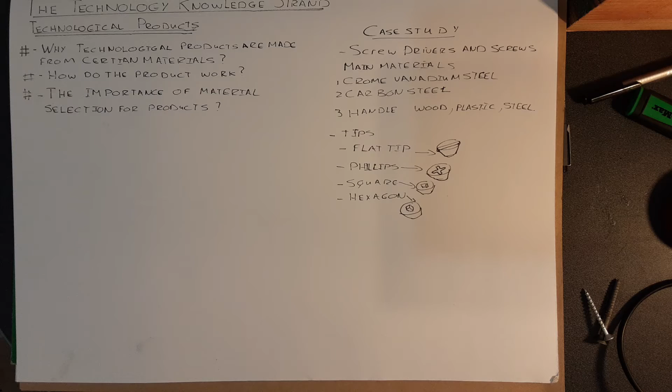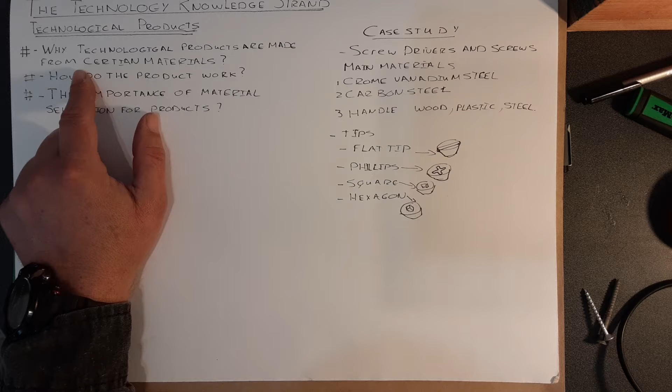In this video, we're going to talk about the technology knowledge strand, and our heading on this one is technological products. So the questions that you have to ask yourself whenever you look at technological products is why technological products are made from certain materials, how does the product work, and the importance of material selection for the products.

So today our case study will be on screws and screwdrivers. What I'm going to do first is talk about just two screwdrivers that I looked at for this study. So we can see different materials already being used here.

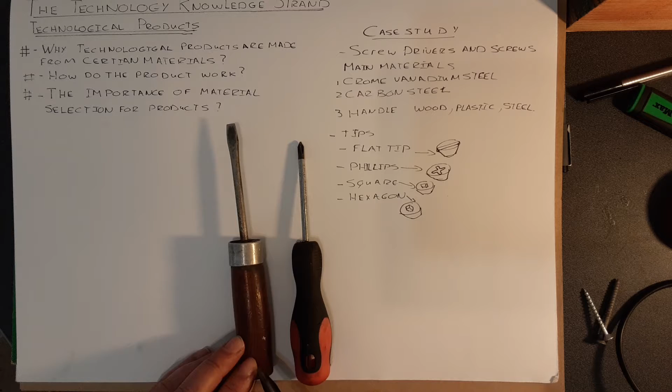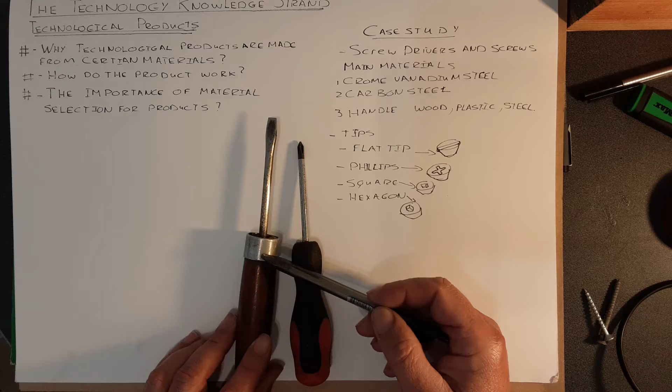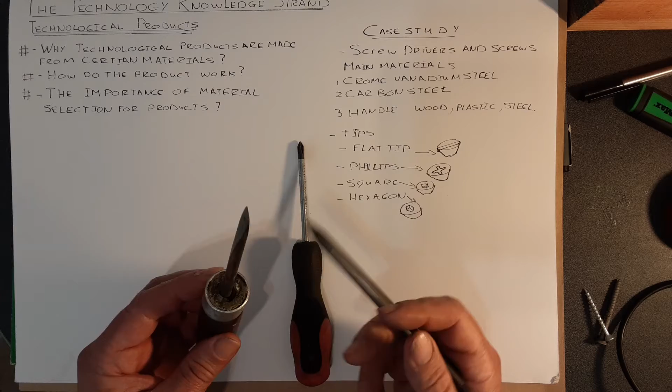So let's look at the materials here. This one, we can see it's probably carbon steel, the front bit, because it gets quite corroded. Then there's a bit of aluminium here to support the part into the wooden handle. Mainly these wooden handles were rosewood because it's quite a strong wood, and actually it looks quite good. So the aluminium ring there is just to keep this bit from splitting when this is forced into the handle bit.

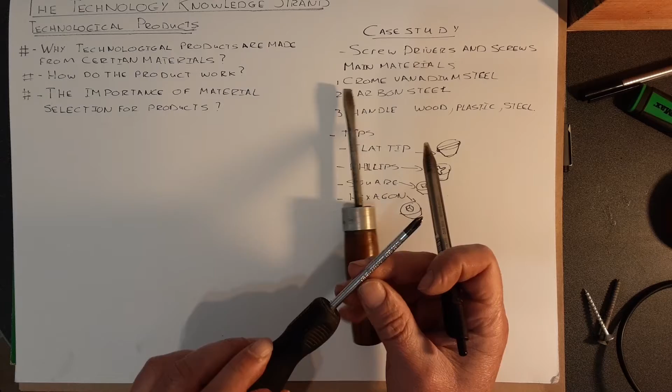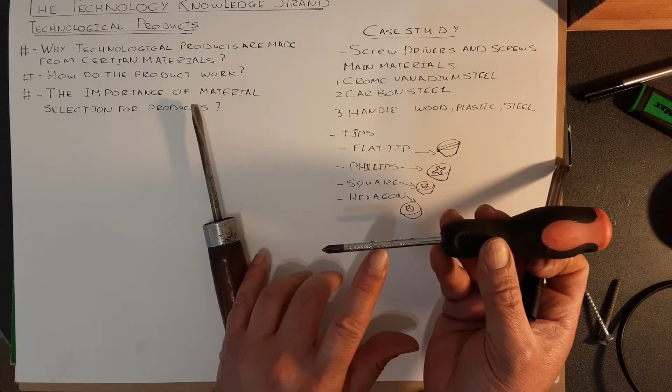So like I say, this is a pre-1950 model, and it still works pretty good. Then the newer ones, you can see as well, the material will be written on here: chrome vanadium steel. This one was the carbon steel and a wooden handle. So chrome vanadium steel, and then the tip will be hardened to keep it stronger.

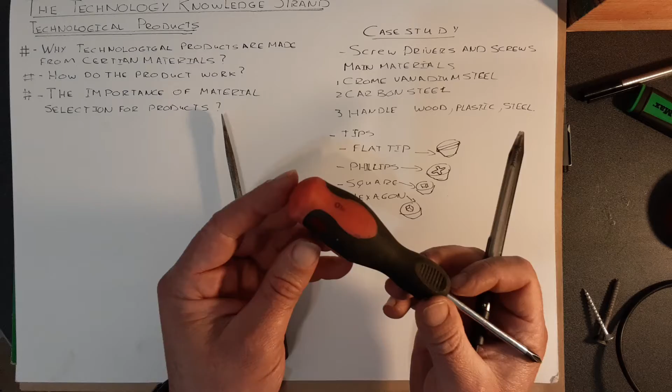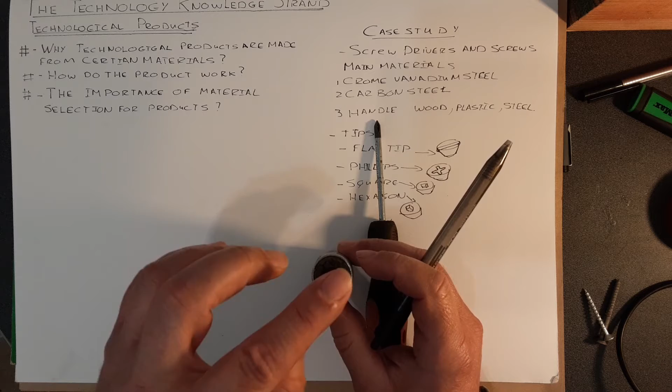Oh, I forgot to mention that this is a flat screwdriver and this is a Phillips head, and we'll go a little bit into that in a little while with the screws. This handle is made out of a rubber and plastic compound, which is cast around this end. The tip will be forced into the screw, into the wooden end.

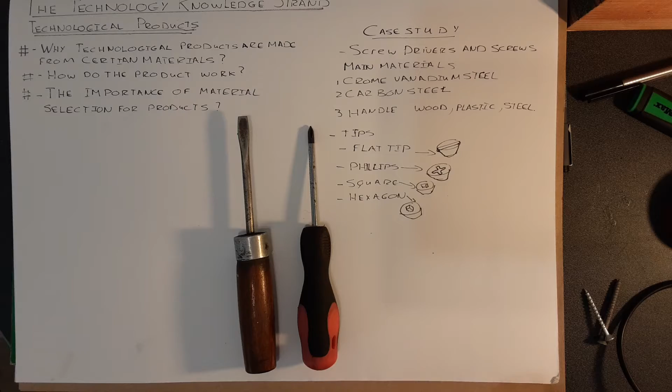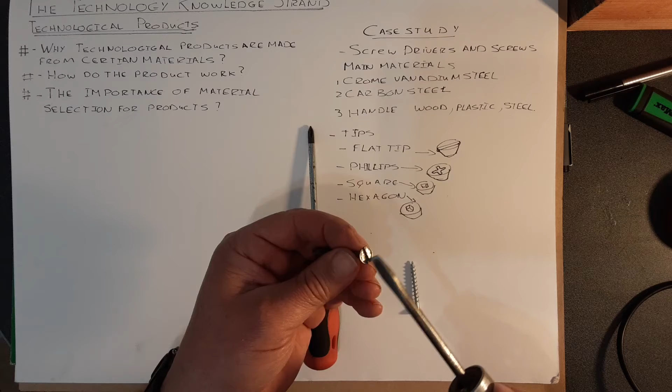So these two are among the commonly used screwdrivers until square heads arrived. This is a flathead screw. The screwdriver fits in there and you can turn it into something. This works really good if something's painted because it will be easy to get the paint out of this part, and then you can still tighten this in.

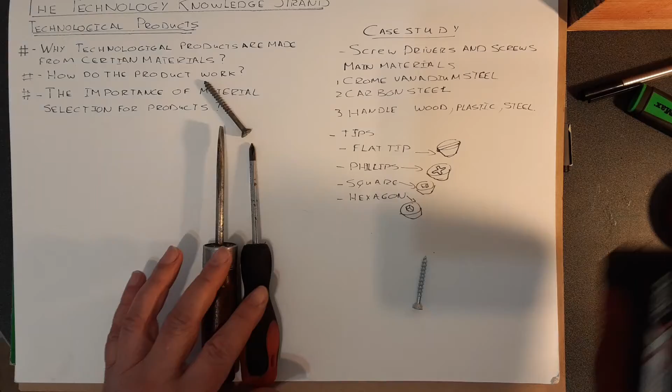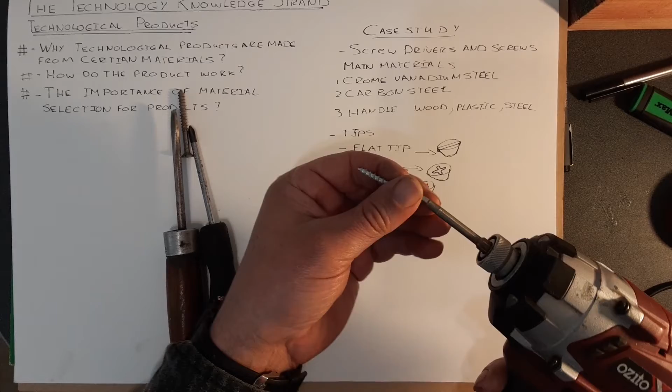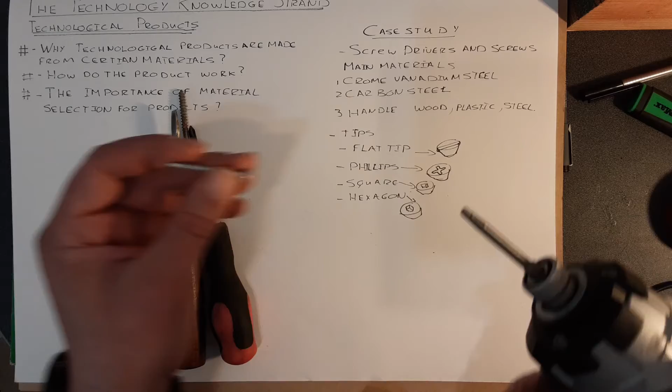Now this is also an evolution of the screwdrivers, so handheld screwdrivers, and this is the impact driver, so you don't have to hand turn stuff anymore. You can just press the button and that turns the screw into something. You can undo it by just changing this around.

So if you look at kind of this little progression on screwdrivers, handheld, and then it came over to machine, and the first ones were with mains power, but the batteries, like you guys know, have improved so much so that this can work really good with a battery powered device. So if there weren't people asking questions, or if there was no evolution of technological products, we would still be using this one, turning screws in by hand.

But stuff has moved up, so flathead, Phillips, and then the squared ones. You get flatheads with the modern handle as well, so the flathead is still around. Phillips is just named after a guy, his surname was Phillips, that patented the first Phillips head screwdriver. And then the newest ones today on the market, it's more or less the same as the square head, but it's just a hexagonal head. So you've got a hexagon on the top, and that gives you more areas, or more parts, for the screwdriver tip to grip onto.

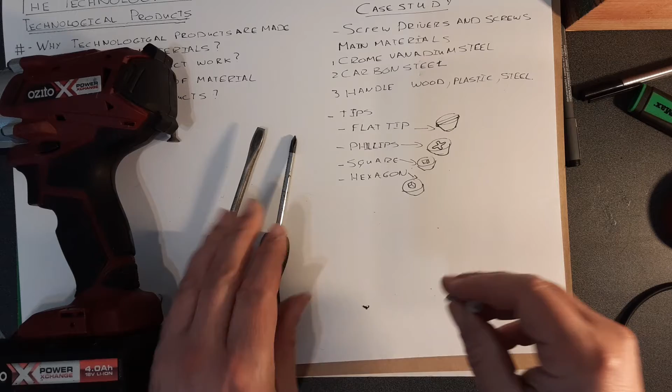Now, looking at all this, let's recap everything quickly. So technological products, what are made from certain materials, how do the product work, and the importance of the material selection for the product.

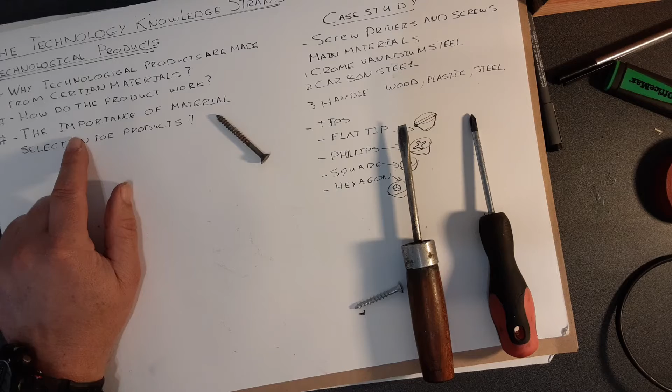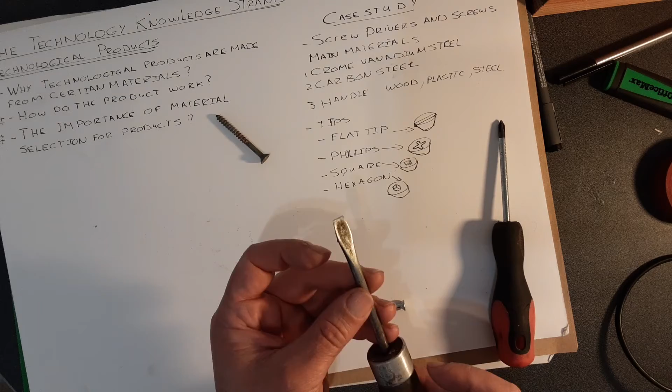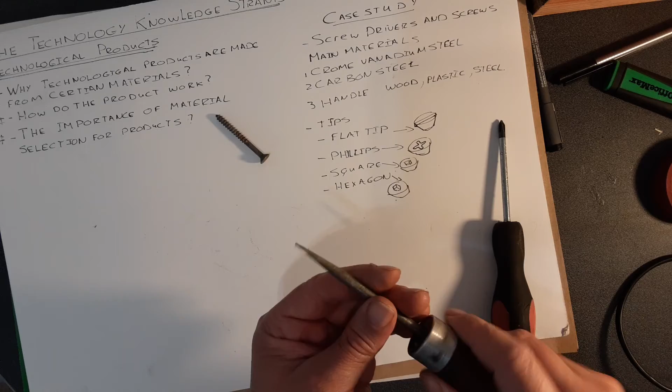So if you made this part out of wood, it will probably won't work that good, that's why it needs to be steel. It needs to be important, the material that you used it from. And then the handle as well, it needs to work. If this falls, if it was a brittle material, it will just break. And the comfort of using it, this one's actually much more ergonomically friendly.

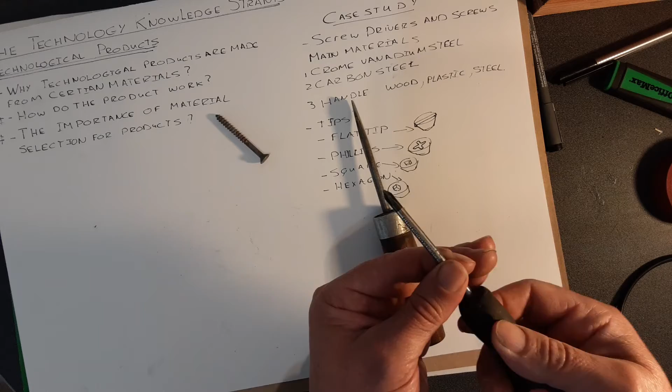With plastics we were able to cast stuff in different ways, so you can use this quite neat. So it's got a quite good grip in your hand.

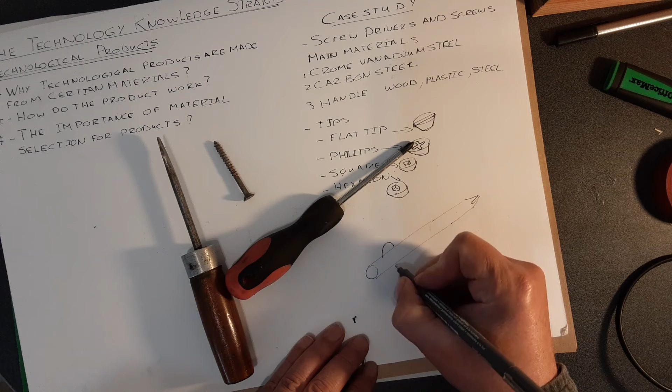Another thing that I just want to talk about is when they cast this screwdriver, the back of the chrome vanadium steel part of it, if you look at it like this, so there's my tip of the screwdriver. The back, somewhere in the back, will be two bits that's just flattened with a punch or a press, and those two bits get cast in here, and that keeps it from being pulled out of here. So it's just two little flat wings that's been pressed into the steel while this is manufactured.

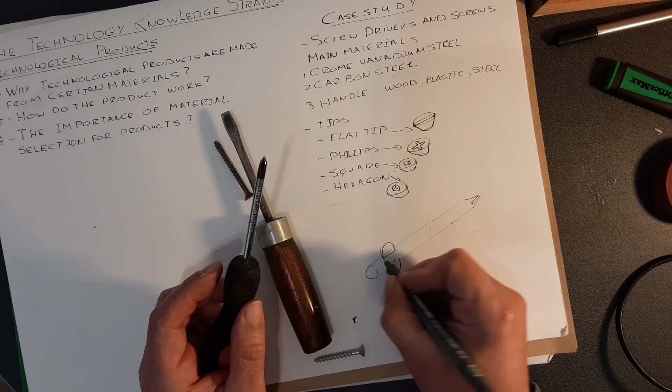And this is hardened, of course, and this one is hardened as well to keep it sharp.

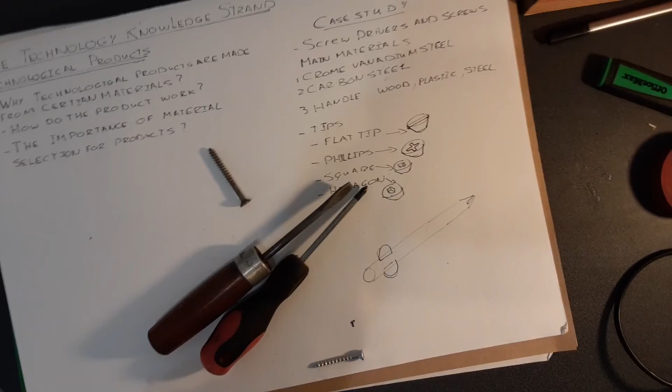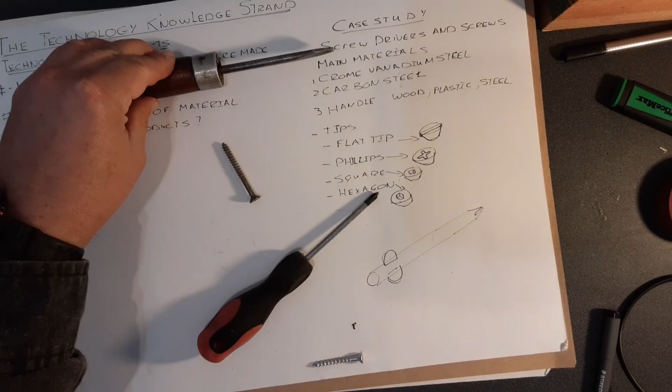So what you need to do for the assignment is identify something at home that you can analyze, like a product or material or anything, and you can draw the product on the top of a page and write a little about it, or if you want to, you can even make a little video clip of your product that you identified.